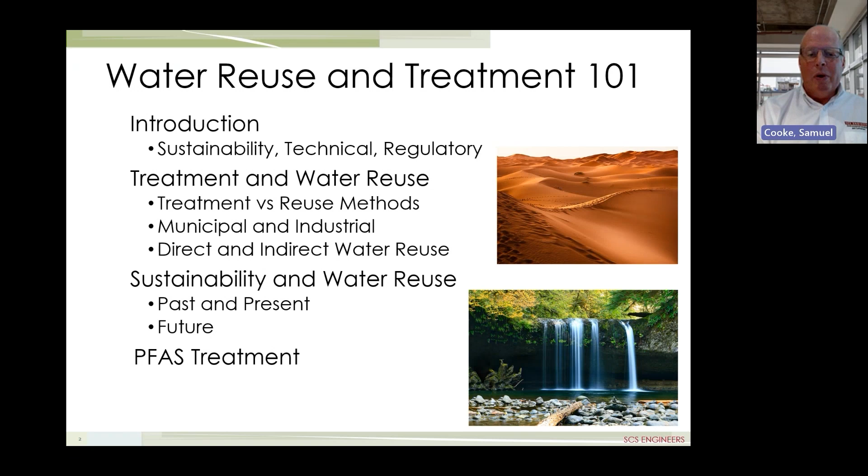Sort of a reuse topic, certainly a treatment topic, is the per- and polyfluoroalkyl substances, or PFAS, an emerging contaminant that's pretty important with the changing regulations. And so water reuse is generally divided into two main categories. There's public, and then there's industrial. And public water reuse covers non-potable and potable uses.

Now, what's this term potable? If you're not familiar with it, it just means drinking water. Industrial reuse is divided more into different specific uses. And we'll go through some of those because there's a couple of SCS project case studies, and I can tell you more about that as we go along.

So what is the big deal? Water's water. It flows out of the tap. You turn on the faucet. So why all the fuss? Earth's surface is 70% water, albeit it's salt water, and you wouldn't want to drink it.

But maybe a little known fact is that of all the world's water, only 3% is fresh water, as opposed to salt water. And 2.5% of all the world's water is locked up in either ice or is below ground. Only 1.2% of all fresh water is surface water, which is easier to get to. So that's the real issue that makes water so important. So water can actually be used and reused. Let's get into some more of the details.

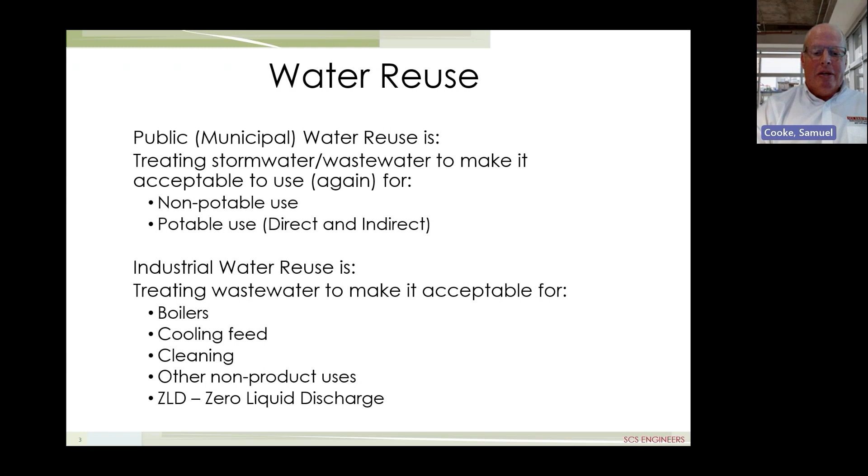So starting with the most basic information about the water cycle, and if you've never seen this before, it's pretty incredible, but how humans access and use water. So it rains, of course, and water infiltrates into the ground by gravity, and some of that groundwater flows out of the ground into streams.

The important thing to see on this graphic is that when you pump water out of the ground, the water table level drops. And if you keep pumping, like at millions of gallons per day, which is pretty typical of municipal water supply wells, and if there's not enough recharge, then the water table just keeps dropping. And it can drop so far that surface water dries up.

And this happened, this is historical, in Waukesha, Wisconsin. It used to be called Spring City. It had so many artesian springs, water was flowing out of the ground. That's 100 years ago, but that was a fact. And so not only did the springs dry up, but Waukesha now has water supply problems, and has for several years. And I actually did a water reuse project for an industrial soup and sauce manufacturer in Waukesha, and we'll get into that.

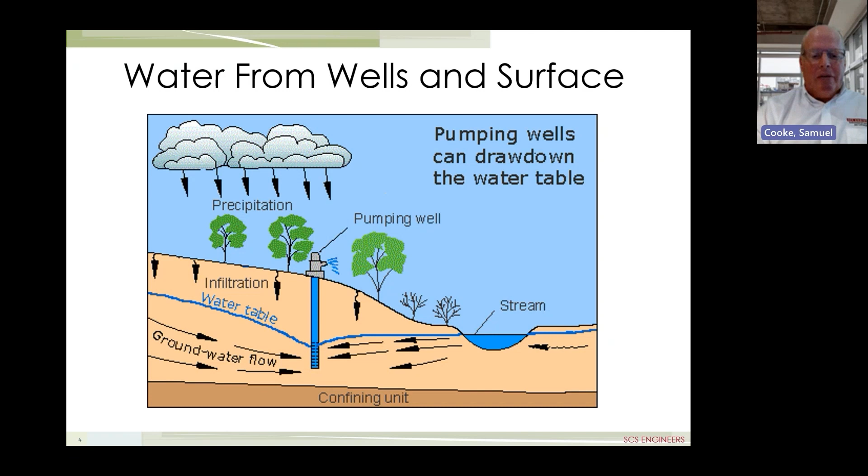But all these stories I just pointed out are about water reuse, water sustainability, water stewardship, and why it's important. Now there's bad news or challenges, and there's also good news. Among the challenges is cost. Aquifer water is relatively low cost. Cost of surface water treatment is higher.

Now, why would low cost be a problem? Well, aquifer water often just needs to be pumped out of the ground. That's why it's lower cost, while surface water requires treatment: equipment, chemicals, labor. Another challenge is the number of chemical pollutants that can occur in our drinking water. And that list of pollutants just keeps on increasing. Like I said, we'll be talking about PFAS, but there's also endocrine disruptors like bisphenol A.

1,4-dioxane is another emerging contaminant. The list goes on. And there's other challenges listed here that can severely affect the water supply. But the last one, I just want to spend a little bit of time on that.

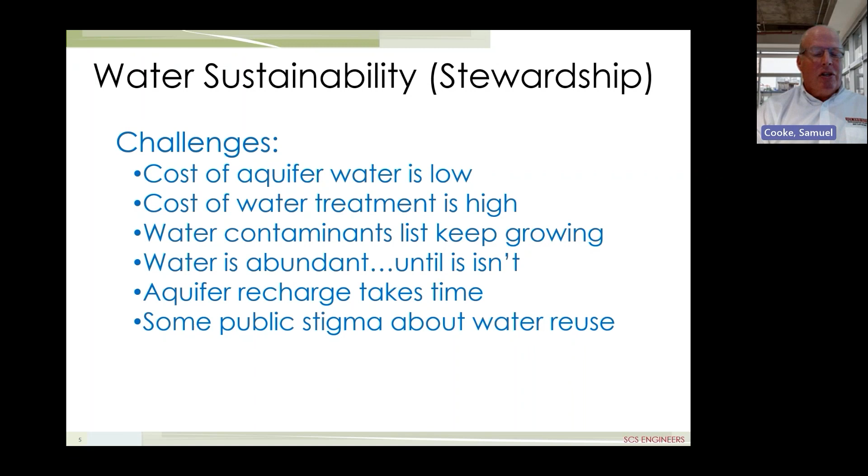It's rooted in, and this may sound crude, a negative slogan that contributes to the public stigma. The statement is "toilet to tap." And it's sometimes brought up regarding potable water reuse. For those who are a bit shocked by that statement, and I kind of am even just saying it, we'll talk about why this is so untrue, and really it's just an uninformed way of thinking. And we'll get into some of the details.

But like I said, there's good news. The Earth's surface is covered by 70% water, mostly salt water, not fresh water. A very small percentage of the Earth's water is fresh water, but fairly simple and overall inexpensive ways of desalination have been developed. So that's really good news. But they do require a change of infrastructure. So that's why you don't see a lot of that going on. But you will, I think, in the future.

And with nature having built-in treatment, that's a major advantage. Humans have benefited, as is often the case, from nature and how water infiltrates the ground and gets filtered through the Earth's built-in treatment system of the soil and the rock below the surface. Up on the surface, where water needs to be treated for potable water use, we do know how to treat it, and we've been doing it for a long time. So that's good news too. And make it so the water that gets treated has a chance of getting reused.

There is federal guidance, and they provide the leadership. It started in the 1980s, and it also provided some funding. So then certain states like California, Arizona, Maryland, New Mexico, Florida, and many others have developed regulations and guidelines. I want to emphasize that there's no standard federal regulations on water reuse. There's only certain states. But industry has also stepped up, like I'll show you with an SCS project example that I was involved with, and then one that Steve Stewart and Kokil Bansal worked on. So let's dive into that a little bit.

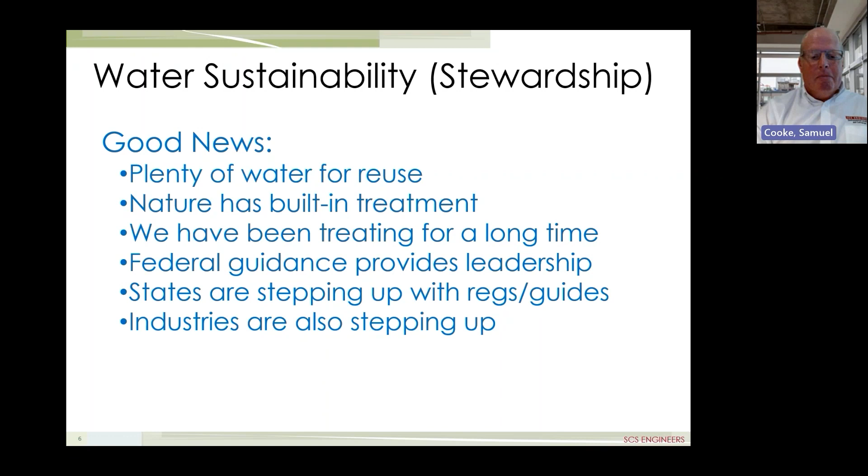So first, Steve and Kokil's project. Here's a graphic from that steel mill project that they worked on. Right in the middle there, greater than 4 million gallons per day are withdrawn from the river. Steve and Kokil found over 2 million gallons per day of potential water losses. And there's a lot of other details. But because of those potential water losses, Steve introduced this steel client to David Hostetter and Sam Rice with our remote monitoring and control group. And they proposed setting up water meters for submetering at various steel mill processes, and those processes use large amounts of water for cooling and other industrial uses.

So that proves out that classic sustainability statement that you can't manage what you don't measure. So I'll say it again. You can't manage what you don't measure. Steve and Kokil, who can give their own presentation on this project, did a really good job on this. I was very impressed. So I won't go into further details, but in conclusion, this client wants to improve their knowledge of their water usage through this report. And now they could save hundreds of thousands, even millions of gallons per day, potentially.

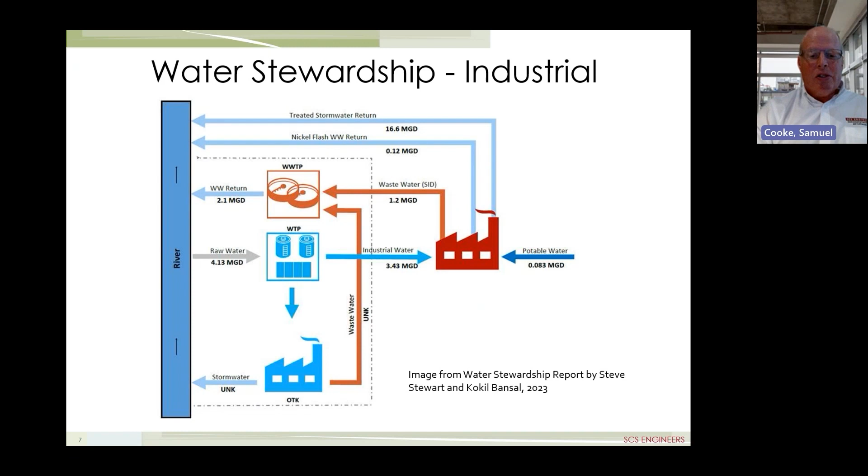The previous slide was on the industrial side of water reuse, which is SCS's current primary area of focus. The other side of water reuse is public water reuse, or what I sometimes call municipal. And it follows its own cycle that's shown here. Start at the bottom with the receiving waters in that green box, which can be groundwater or surface water. And that becomes the blue water supply on the left. And after use becomes the purple wastewater right in the middle.

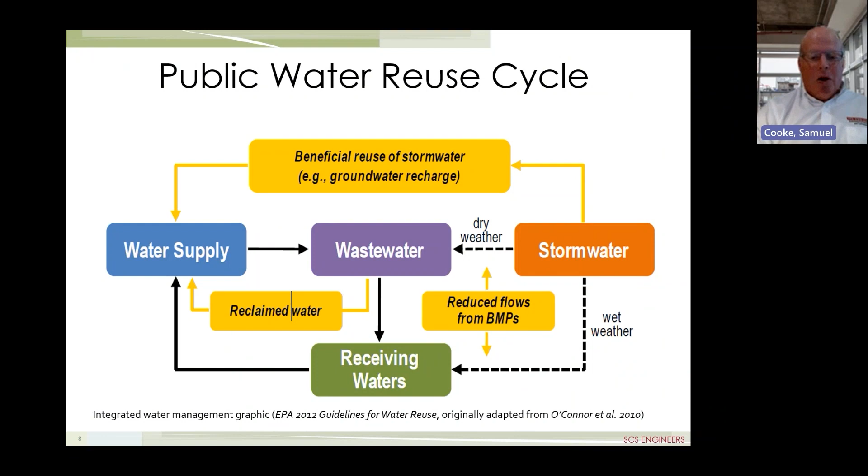Now, here's where some of the water reuse comes in. If the wastewater is treated further, beyond the normal primary, secondary, and tertiary treatment steps, and we'll get into what that involves, then the lower left yellow reclaimed water can be added back to the water supply. And meanwhile, swimming around all this is the orange stormwater that also has its place in the water reuse cycle, as you can definitely see.

So what does public water reuse actually look like? Here's an example of public water supply that includes reuse. It's in Orange County, California, where the first SCS office is located, near to that in Long Beach. What you see in the photo is part of the world's largest treatment system for indirect potable reuse.

Water goes through microfiltration membranes, reverse osmosis membranes, as well as something called advanced oxidation processes that involve ultraviolet light and hydrogen peroxide. And all that creates a very, very pure water that ends up in the Orange County groundwater replenishment system.

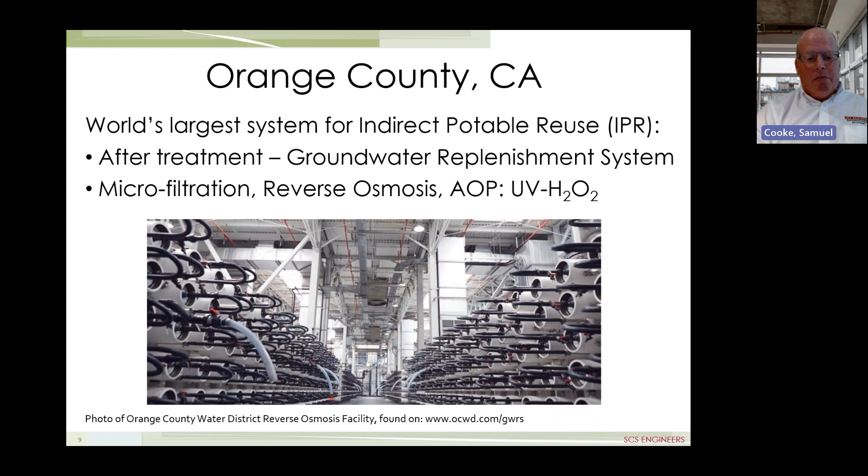These white cylinders that you see in the photograph, the water district's reverse osmosis membranes are inside there, and the RO permeate, or clean water, exits out the end of the RO units through those gray curved tubes. So you can see it's a pretty big system, and this is just part of it.

Staying on Orange County, the microfiltration, the reverse osmosis membranes, and the advanced oxidation processes create that ultra pure water that's injected into the ground. This graphic shows how of the 130 million gallons per day, 30 million gallons per day is injected to keep the salty seawater from the Pacific Ocean from intruding into the freshwater aquifer that's more inland. And 100 million gallons per day is infiltrated through the ground and becomes part of the drinking water source that's pumped from the drinking water wells.

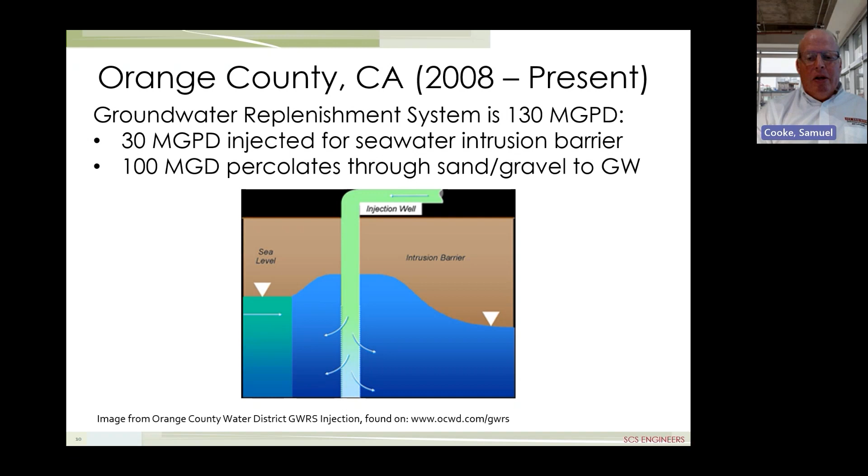Orange County's first initial system was built in 2008, was upgraded in 2015, and the latest upgrade was completed this year in 2023. So going from local California to national, how widespread are water reuse regulations and guidelines?

This graphic shows that as of March of this year, 30 states have regulations or guidelines regarding landscaping water reuse, so taking treated wastewater and using it for lawn, garden, even farm irrigation. The blue states have the regs and the guidance, and the gray states do not have the regs or guidance for landscape water reuse, or at least not yet.

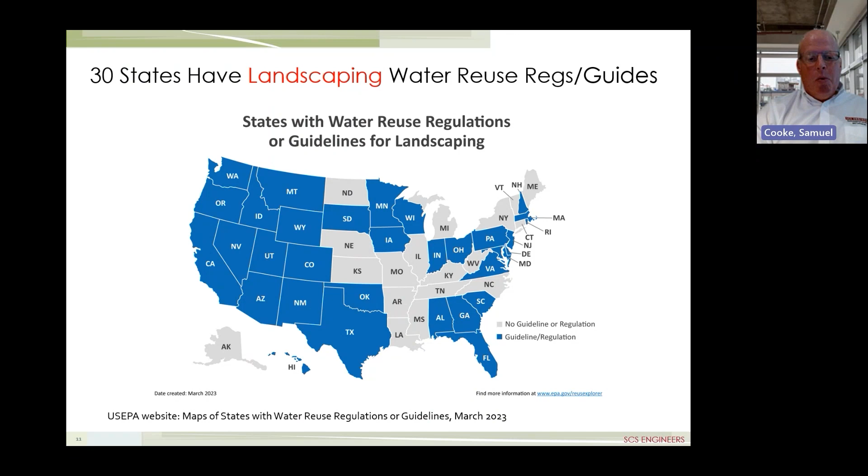Here's the third and final graphic, and there's a bunch of these if you're interested. You can see the website down at the bottom. This shows the 15 states that have regulations or guidelines regarding industrial water reuse.

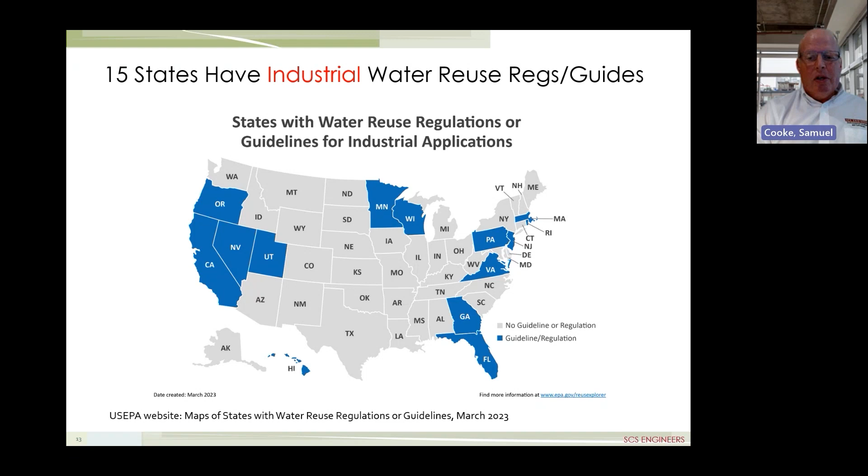Of the many types of water reuse, the most stringent treatment is for potable drinking water reuse. Starting at the top of this graphic, there's primary, then secondary, then tertiary treatment, followed by disinfection. A lot of you liquids management folks might recognize that's basically the way that wastewater is typically treated, the activated sludge treatment process.

Sometimes tertiary treatment is not incorporated in the activated sludge treatment process, but primary treatment, secondary treatment, and disinfection always are. Normally, treated wastewater from those three or four steps is discharged directly to surface water.

For potable water reuse, it requires the remaining steps, starting at the middle left: microfiltration, then reverse osmosis, then the ultraviolet light advanced oxidation process. In this case, there's also a degas step with remineralization of the water using lime. Once you've run through reverse osmosis, it pulls all of the minerals out, so the taste of water can be a little astringent if you don't remineralize it. So lime is used for that, and then degassing removes oxygen for corrosion resistance and things like that.

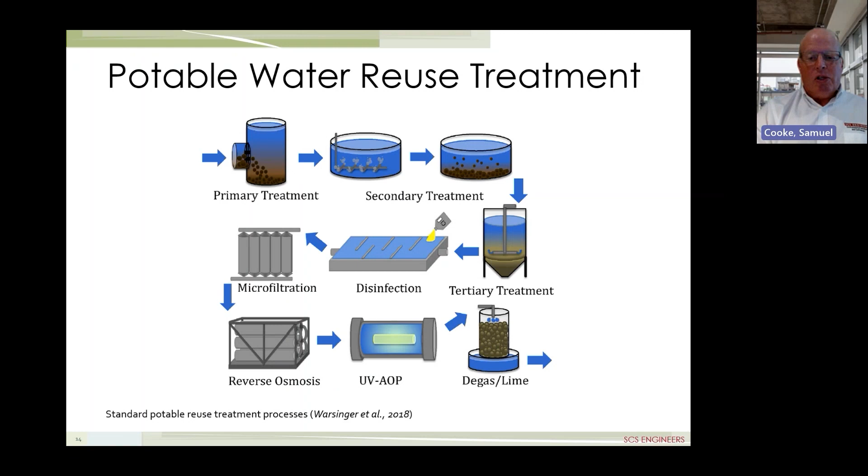So for potable water reuse, there are multiple robust treatment processes added to the normal wastewater treatment steps we talked about. So you can see how the phrase toilet to tap is such an untrue statement. Now let's get into some more of the industrial water reuse details.

I did a project that has water supply issues. In this case, looking two or three years down the pike, they were facing as much as three times the cost of what they were currently paying for water that was going to be supplied two or three years from then.

Really cool company. On this graphic, you can see how the industrial water was being used. And just so you know, industrial water reuse projects, the first step is always establishing the water usage through process submetering. We were able to use some of their submetering that they had already. So you can see in this graphic, the blue water usage, or process cooling water, that's the single highest water usage. And their process cooling water is used by what's called a once-through cooling type of system.

And like the name suggests, it means that 54-degree potable water is run through the cooling processes, heat exchangers, and water that is just running through one time cools the hot product. And then that water hasn't been in contact with the product; it's going through a heat exchanger. So it's not in contact, it's cooling it through the heat exchanger walls. That water is then discharged to their storm sewer.

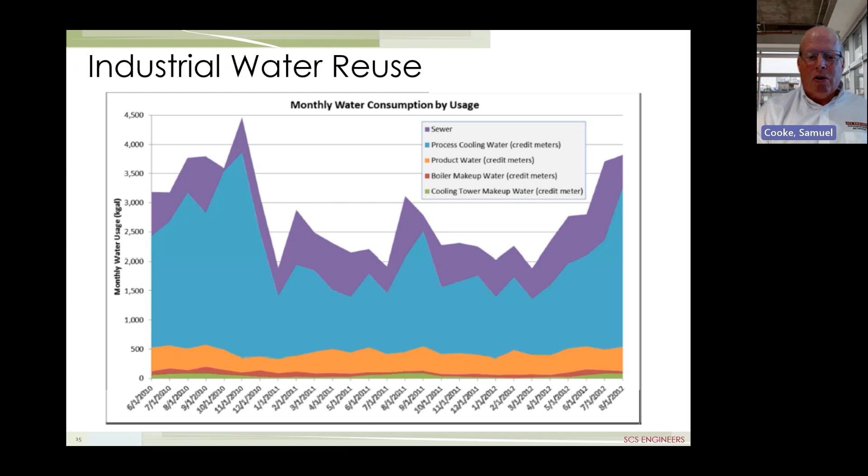So in our industrial water usage assessment, what we discovered was they were using what I would term a high total dissolved solids water for their cooling towers and their boiler makeup water. So why is that an issue? Because cooling towers and boilers, as you know, evaporate water, and that causes the water that is not evaporated to increase in dissolved solids, and that causes increased concentration. Higher concentration total dissolved solids water is then blown down, or simply wasted down the drain, to get rid of that high dissolved solids water.

And if lower dissolved solids water is used as makeup water, then a lot less of that blowdown has to occur. So what we did is we recommended that reverse osmosis be used to reduce the total dissolved solids in the makeup water for the cooling towers and the boilers. And that made it so that when you feed a lower concentration of water to your cooling towers and boilers, you don't have to blow down even close to as much.

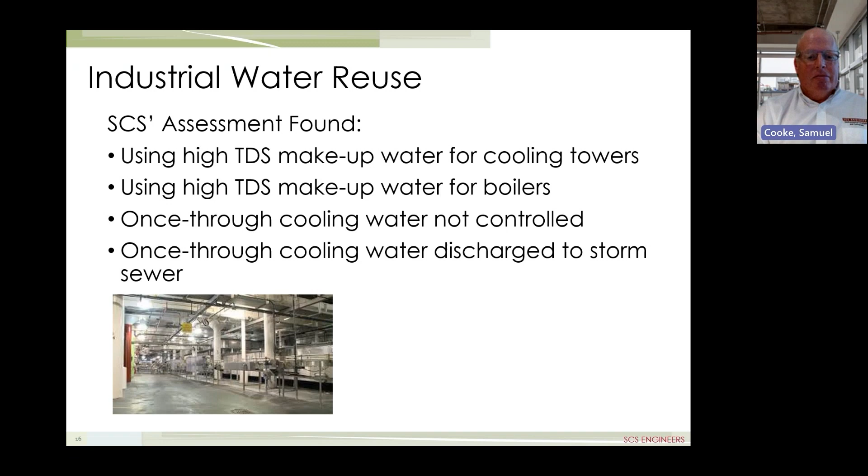So in addition to those issues, the volume of once-through cooling water wasn't being controlled. And we already talked about once-through cooling water. So that cooling water was being used, and more of that once-through water was being used than needed to be. And it was just simply being wasted down the storm sewer after only passing through the cooling system once. So you can just imagine the issues that would cause as far as cost.

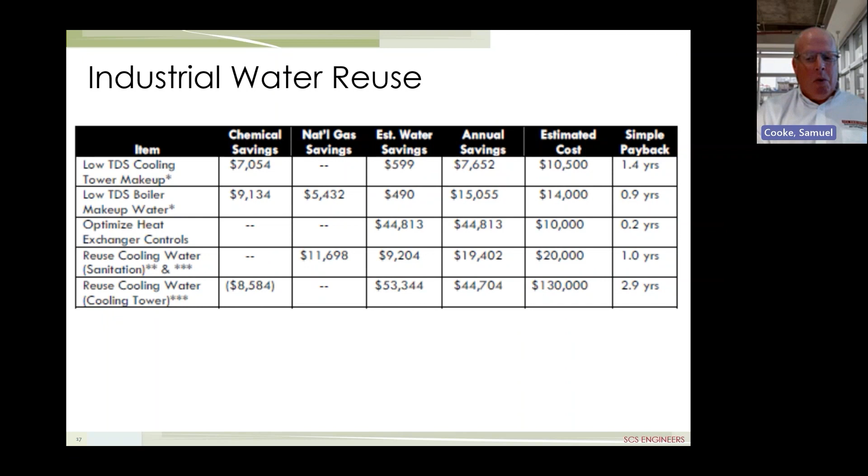I'm just going to point out that the last 2 engineered solutions proposed reusing once-through cooling water for their nightly complete plant sanitation. That's what that sanitation reference is. So that's their cleaning, where they clean the entire facility. The once-through cooling water was still clean water. So why not use it for a purpose that's not related to production? And if they couldn't use it for sanitation cleaning, then a longer payback reuse would be reusing the clean water for cooling tower makeup. You can see that on the bottom.

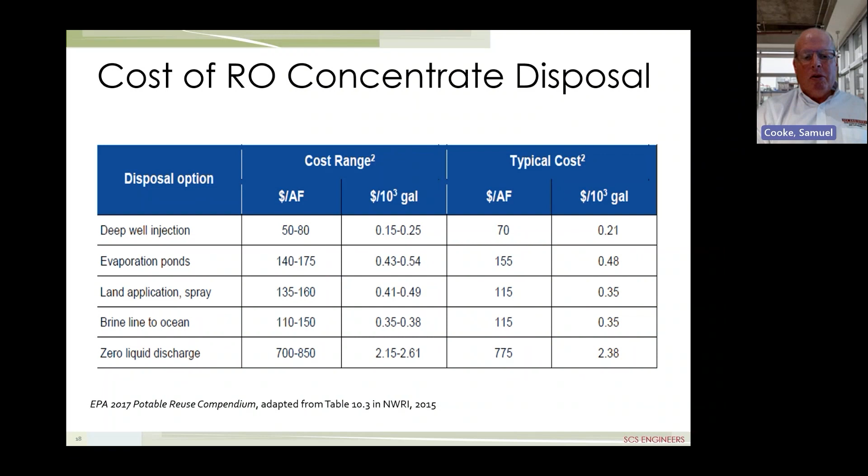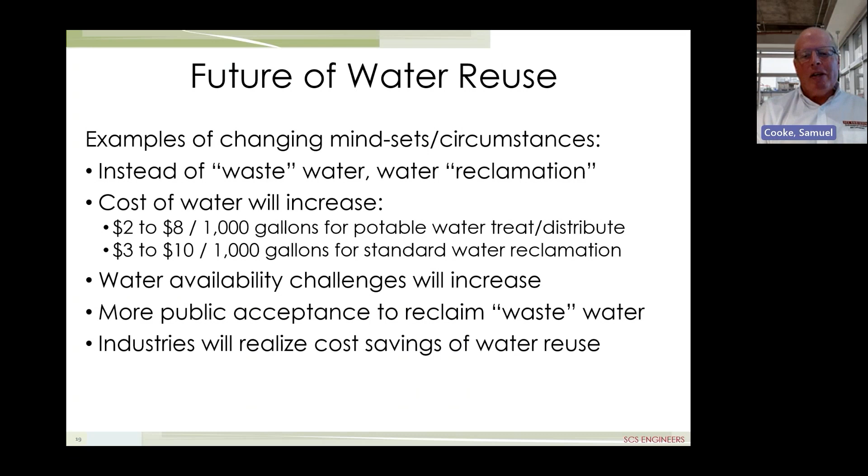So the rest of the presentation is on per- and polyfluoroalkyl substances, PFAS. And just in case you aren't familiar with PFAS, I'll just do a one paragraph intro. So PFAS is a large group of man-made chemicals that have been in use since the 1940s. Examples would be firefighting foams, consumer products like Scotchgard, on couches, on carpet. And the reason that PFAS have been so popular is because of their superior heat resistance, thus the firefighting foams, stain resistance, like your Scotchgard, for the carpets and Gore-Tex, clothing, furniture. They also have superior surfactant properties.

So as far as the number of PFAS, it's this huge group. And so there's a list called PubChem. And if you're not familiar with that, that's the largest list of chemicals in the world. They list approximately 6 million PFAS compounds. US EPA lists about 15,000 unique PFAS chemical compounds.

Now, PFAS are problematic because they're very persistent in the environment. It's that carbon-fluorine bond. It's the strongest bond in nature. Very persistent and don't readily break down. And to further compound the problem, PFAS have been found to be toxic to humans and other life. So they can be carcinogenic, cause low birth weights, cause increased cholesterol formation, things that you, of course, don't want to have happen. However, if you like chemical names, then you will love PFAS.

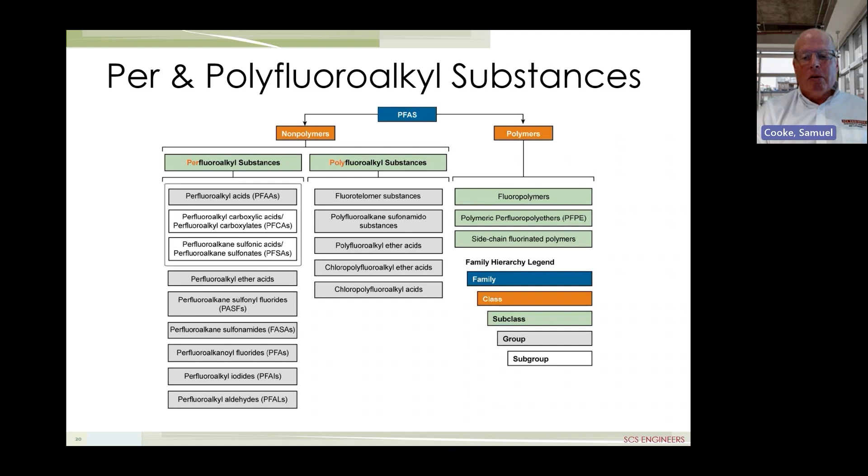So here in this graphic, you see it start with PFAS and then the classes of polymers and non-polymers near the top, and then you have the subclasses, groups, and subgroups. I'll draw your attention to the middle column and the first gray, the fluorotelomer substances. We'll get into those a little bit when we talk about evaporators, but not only are PFAS persistent in the environment, but there's also a volatile subset called these fluorotelomer substances. And so they can volatilize.

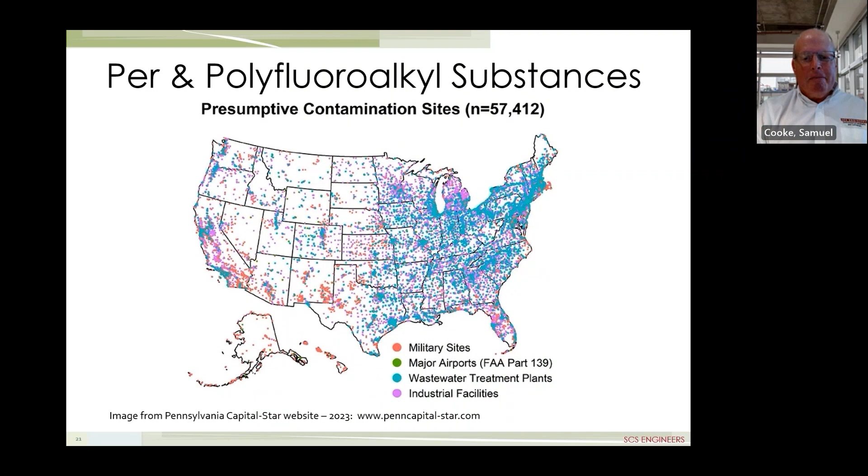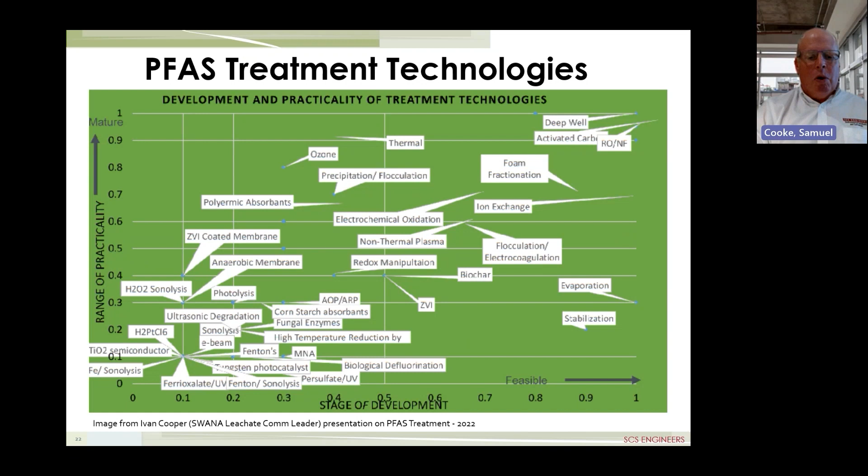And so you see deep well injection is way to the right and way up top. But you also see activated carbon, reverse osmosis, nanofiltration, foam fractionation is up there too, ion exchange. And we'll be going into more of those. So I've chosen a few of those more proven treatment technologies: our old friend, reverse osmosis, again, deep well injection, foam fractionation, as well as several other technologies.

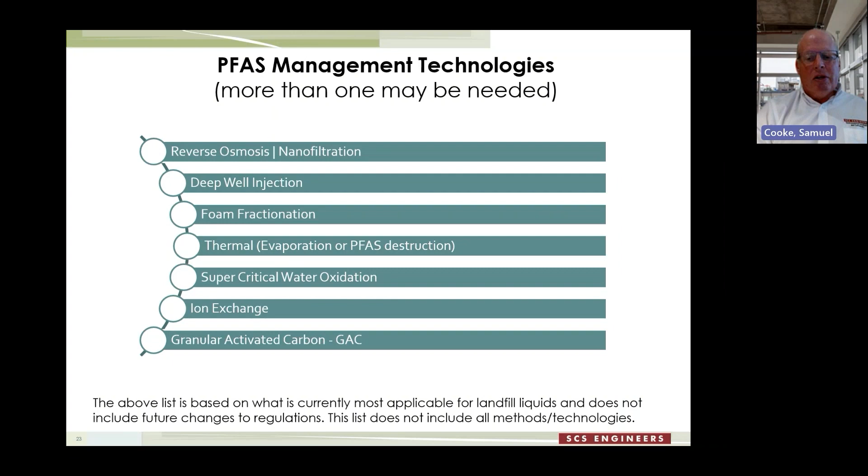So permeate, that's the name for what the clean water is. It's treated and it discharges out the end, and I'll show you a close-up of what the RO membranes look like. And then the concentrate, for landfills, is usually recirculated back up to the landfill.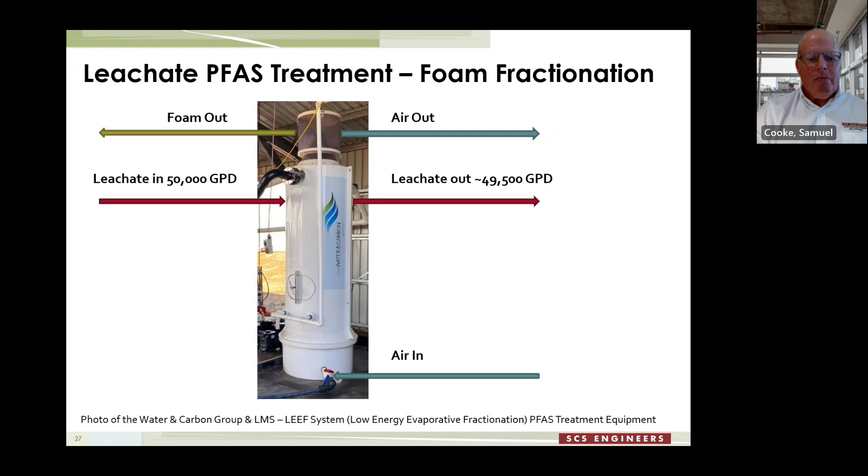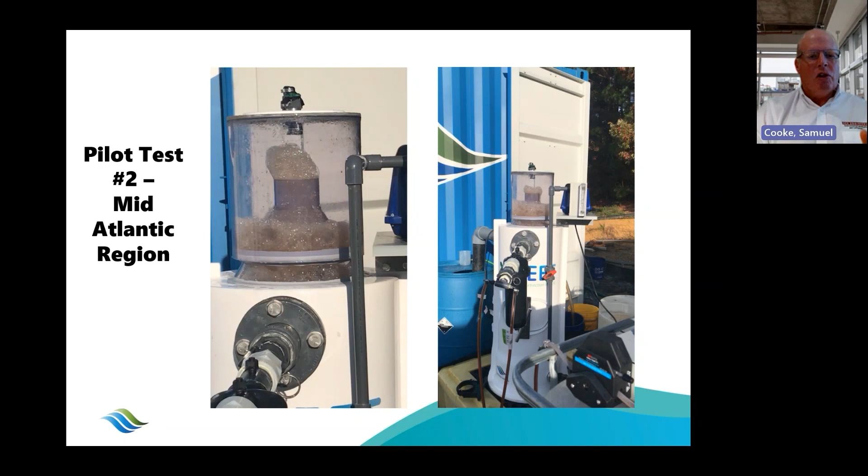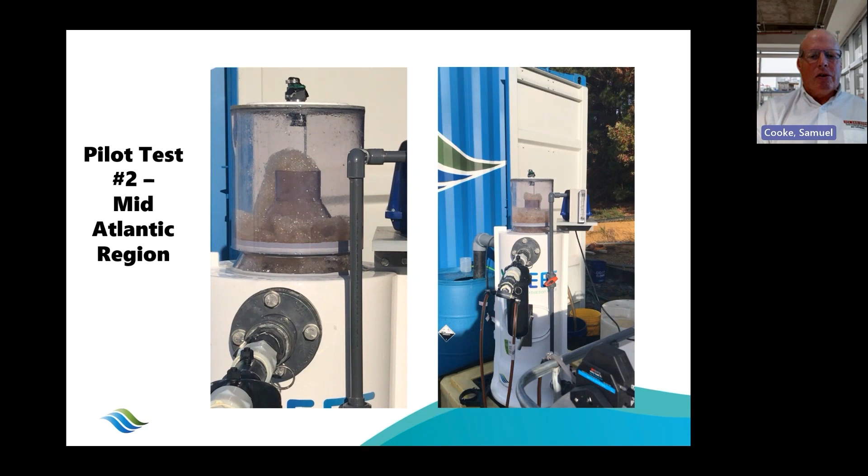So I'm going to show you one of the least exciting videos that you will ever see, probably in your life. But just look closely at the little foam cap there on the left side. So that foam is coming right out the top. And then there's another version on the right. And if you didn't have enough of the foam belching out on the left, then I wanted to show you this one.

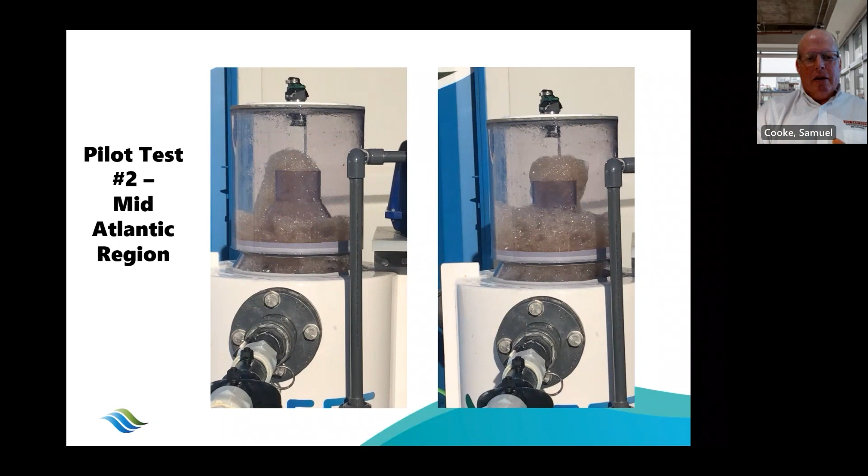And I found that as I try to advance, it goes through all of the videos again until finally I get to the next slide. So if I didn't know that was going to happen, I would probably think, well, my computer is freaking out right now on this video.

But sticking with the foam fractionation, you can see here, and there's a lot of information here, but look at the raw leachate, and let's just follow PFOA, the second one down. So the raw leachate feed was 1,400 parts per trillion, and it's treated to below detection limits at 11.1 parts per trillion. And again, this is parts per trillion, which is 10 to the minus 12.

And so then look at the RO reject, which foam fractionation has a particularly good application for. And you can see that the feed for PFOA is 12,500 parts per trillion. The foam is much higher in parts per trillion. And so you can see in the graphs to the right just how much the different PFAS constituents have been reduced.

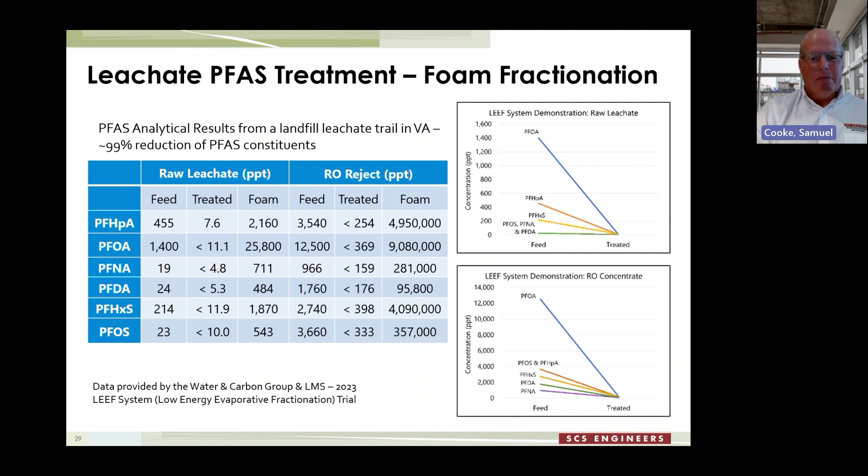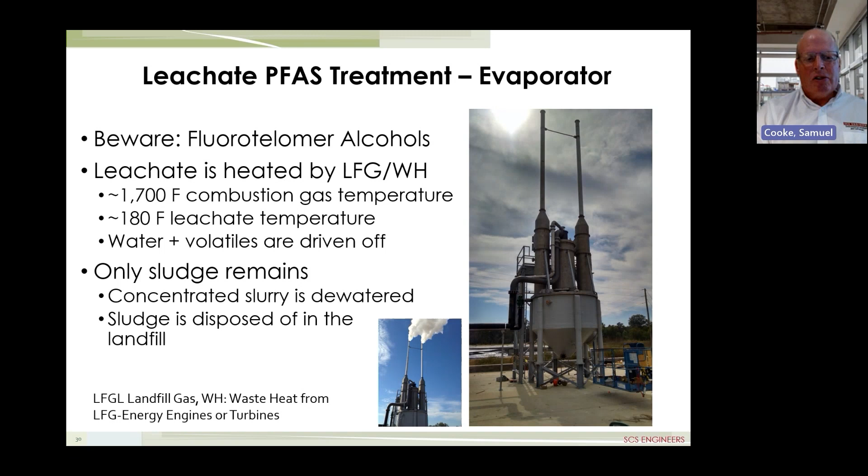So another leachate PFAS treatment methodology is using an evaporator. Like I said before, fluorotelomers, in this case fluorotelomer alcohols, are the volatile constituents that can actually pass out of the evaporator if they're present in the leachate or whatever other wastewater is being evaporated, and be discharged. There are some other facts there regarding evaporators. They can operate based on landfill gas or waste heat, and a sludge does remain. So just like RO has a concentrate, evaporators also have a concentrate.

Here's thermal destruction. Those other ones were separation technologies. This is a thermal destruction technology graphic. This is showing plasma, and this is more of a research cell, but you can see the colorful purple plasma that's extremely high temperature.

PFAS itself normally requires greater than 1,800 degrees Fahrenheit to break that carbon-fluorine bond. Regenerative thermal oxidizers operate around that temperature. Other incinerators also operate around that temperature. So those are very interesting from a research standpoint regarding thermal destruction and how you can get energy from waste using those. But it does require a lot of energy if it's not self-sustaining.

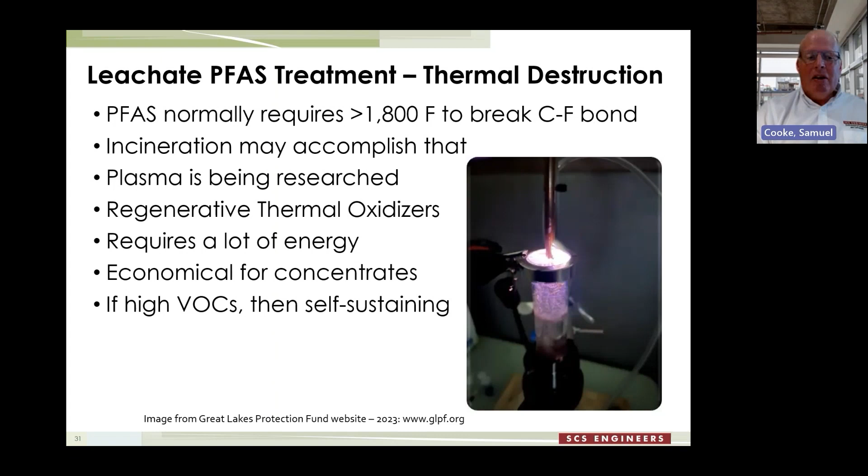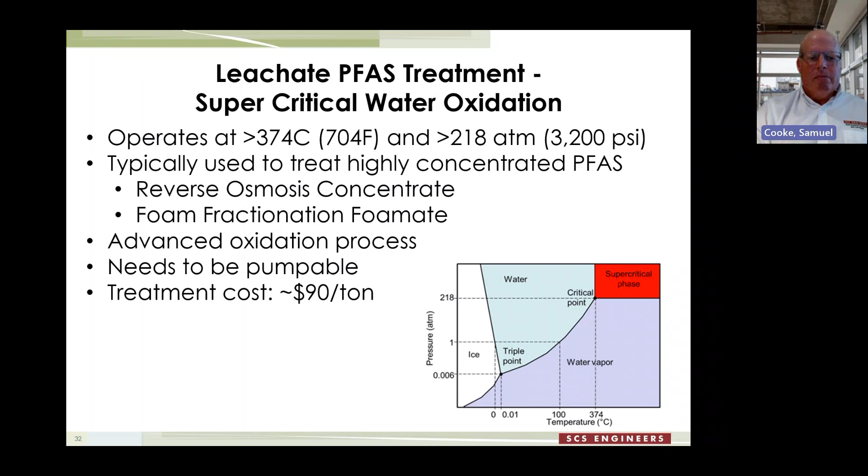And it's really good for reverse osmosis concentrates and the kind of concentrate that comes from foam fractionation, which is called foamate. Just a little factoid, the approximate treatment cost is around $90 per ton. The waste does have to be pumpable, so it doesn't handle solids.

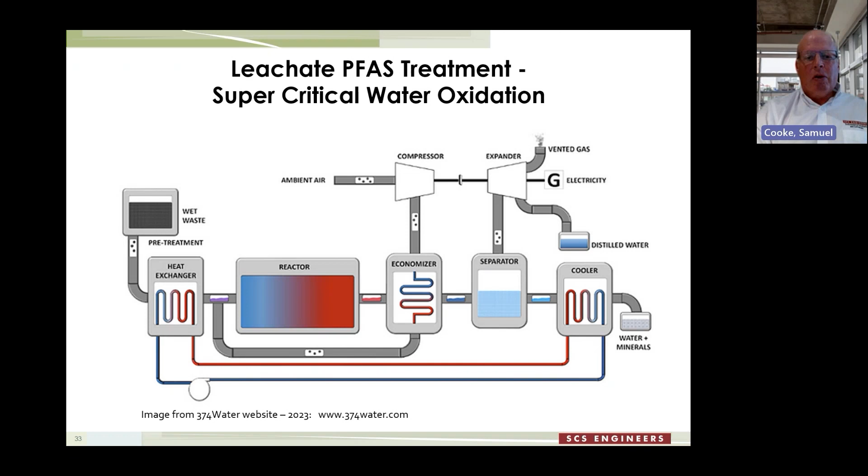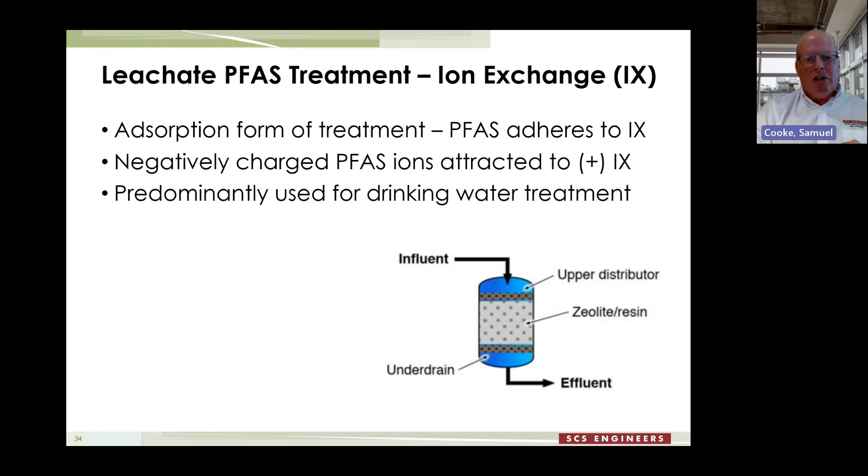Also talking about ion exchange as a leachate PFAS treatment. This is an adsorption form of treatment. That little graphic is representing a vessel. You've got your influent coming in the top, effluent going out the bottom. You've got a resin type media, and that's the ion exchange media. The negatively charged PFAS ions and other contaminants you want to remove using ion exchange are attracted to the positively charged ion exchange resins.

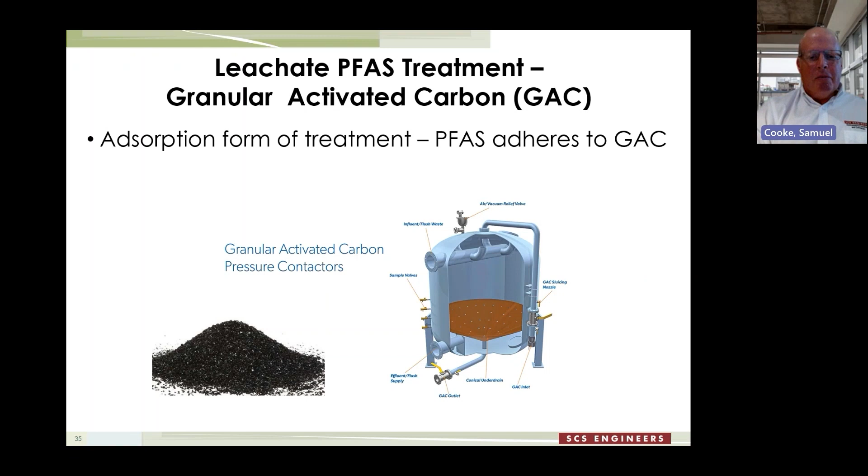Another adsorption method of treatment is granular activated carbon, and you see an example of carbon on the left there, a little pile of granular activated carbon granules. Again, this is another adsorption form of treatment. PFAS adheres to the positively charged sites on the granular activated carbon. It flows into the vessel that you see, passes through the granular activated carbon, and then passes out.

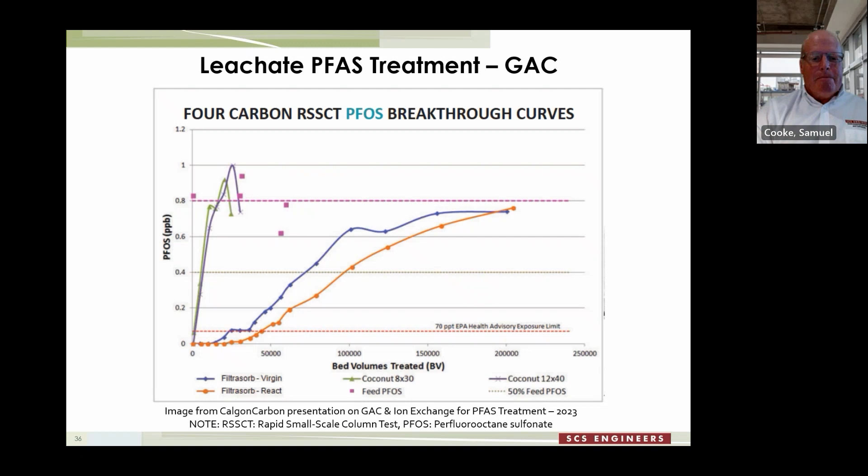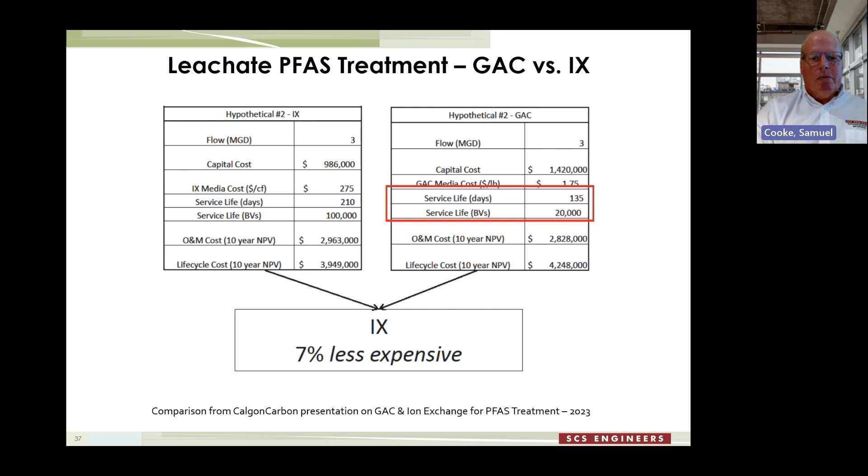So that's my talk on PFAS and on water reuse.